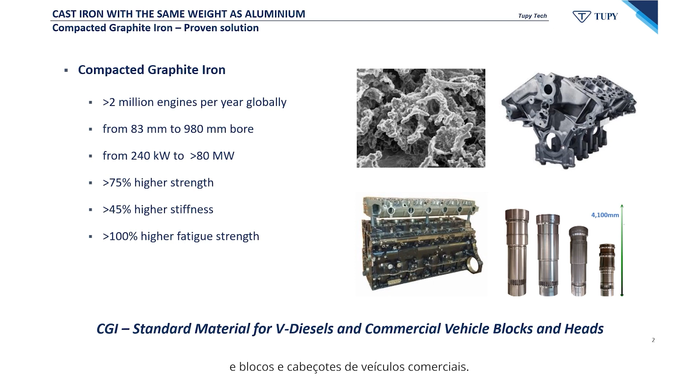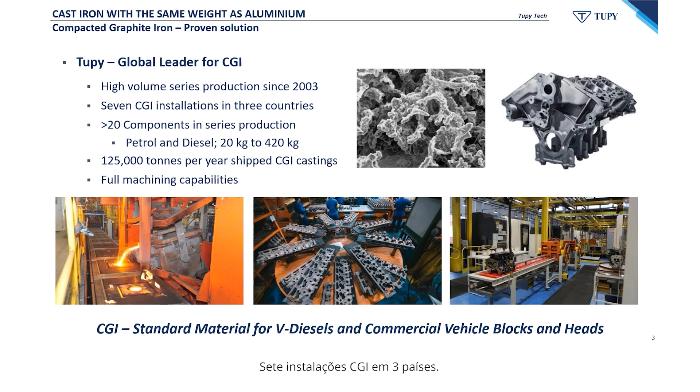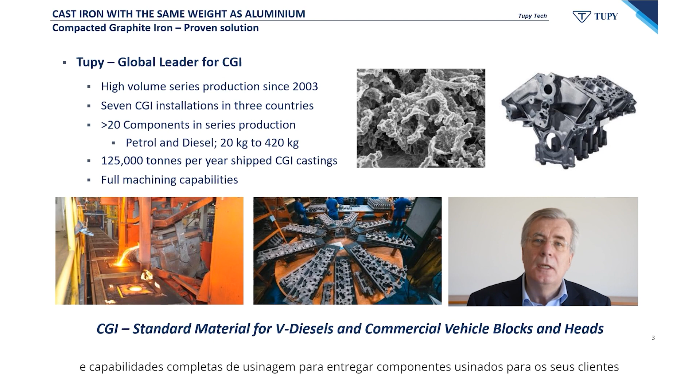Tupy is the global leader for CGI production. Tupy has had high-volume series production for CGI engines since 2003, with 7 CGI installations in 3 countries. More than 20 components are in series production for petrol and diesel engines, ranging in weight from 20 kg up to 420 kg. More than 125,000 tons per year of shipped CGI castings, with full machining capabilities to deliver machined components to our customers.

Why do we still use aluminium engines in passenger cars? The density and weight of aluminium is attractive, and we have relatively good thermal conductivity, which is especially interesting for cylinder heads.

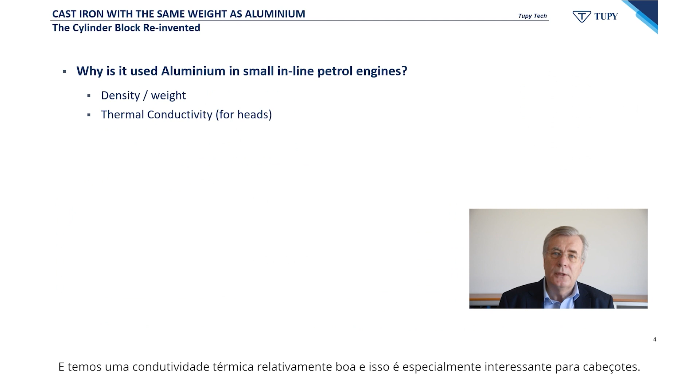Everything else is a compromise. Strength, stiffness and fatigue are limited. We need cylinder liners or surface treatment. The metal volume must be large, so the breathing areas are limited. The life cycle energy and CO2 footprint for aluminium is challenging. The NVH behavior is limited, and we have cost issues.

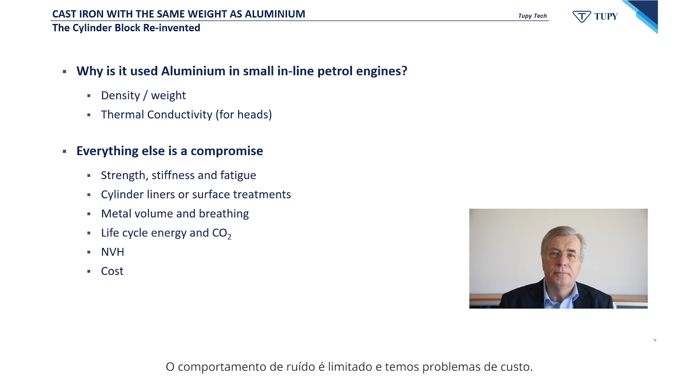Now the question is, what if the cast iron cylinder block was the same weight as aluminium? This question we will answer with a joint development project together with SinterCast and Ricardo, to build a demonstration engine and prove our concept.

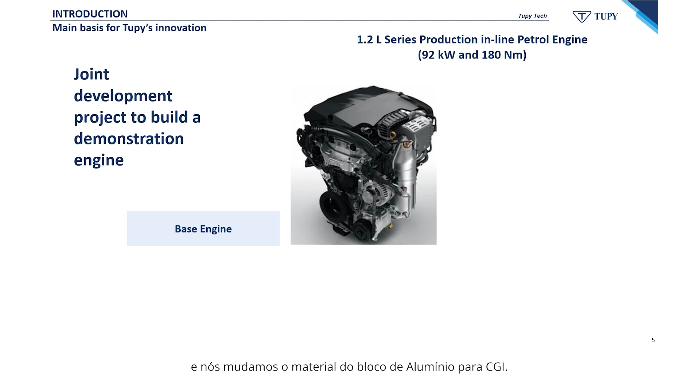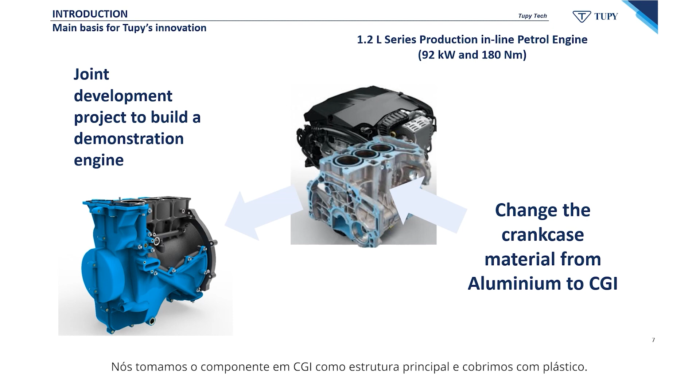We selected as base engine a 1.2 liter series production spark-ignited engine, and we changed the crankcase material from aluminium to CGI. We took the CGI component as the main structural part and covered it with a plastic casing.

Now let us have a look at the base engine. Here you see the crankcase and the bed plate, and together with the caps, this base engine crankcase has a weight of 21 kg.

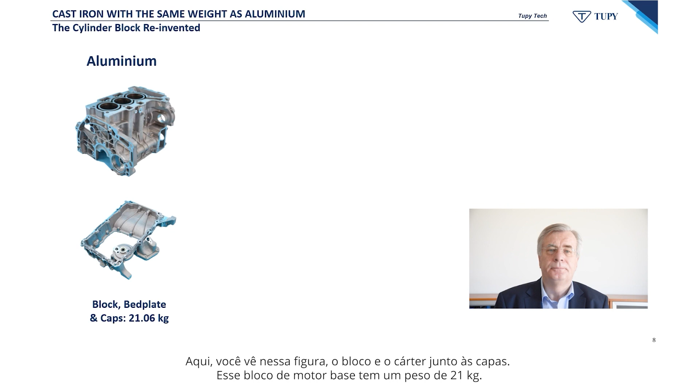In comparison, you see the CGI block, ladder frame, casings and caps. The CGI crankcase has the same weight as the aluminium crankcase. The additional results are 54% less material, which gives a better situation for the breathing areas, which could be increased. We also have the same or better NVH behavior.

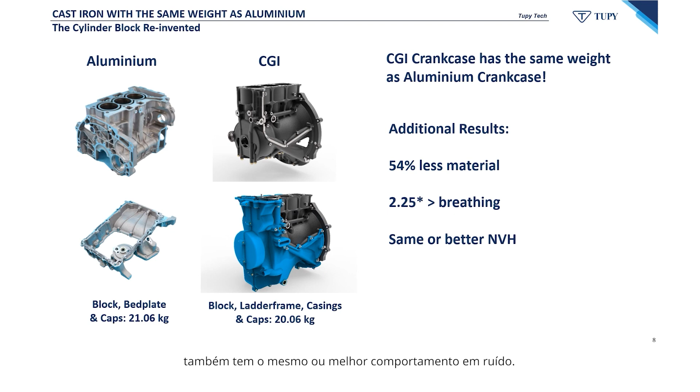Now let's have a look at the components of the Tupy CGI engine. Components A, D and E - the cylinder block, the ladder frame and main bearing caps - are cast in CGI. We have thin walls and the possibility to increase stiffness with fracture split caps.

Components B and H are produced from PA material. The casing incorporates oil galleries, oil cooler mount, oil pan and timing case. Component H is the ventilation module, which supports the blow-by behavior from the crankcase to the cylinder head.

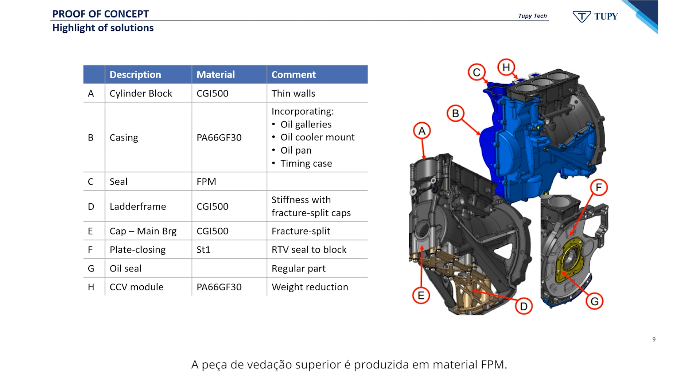Component F is a steel plate closing, and G, the oil seal, is taken from the original engine. The upper seal is produced from FPM material. Now let us have a look at the new CGI crankcase.

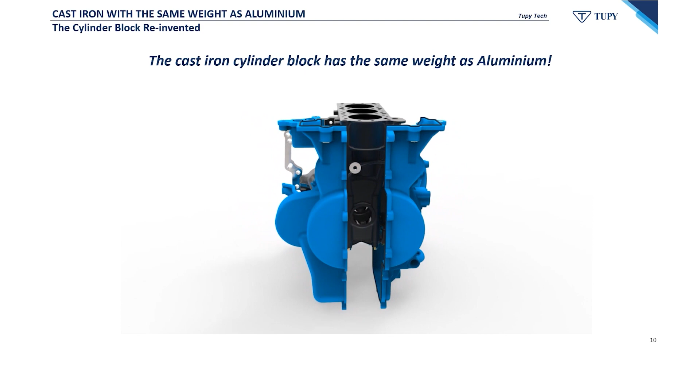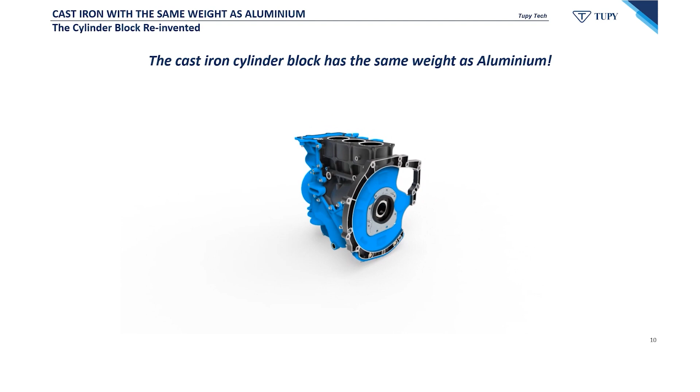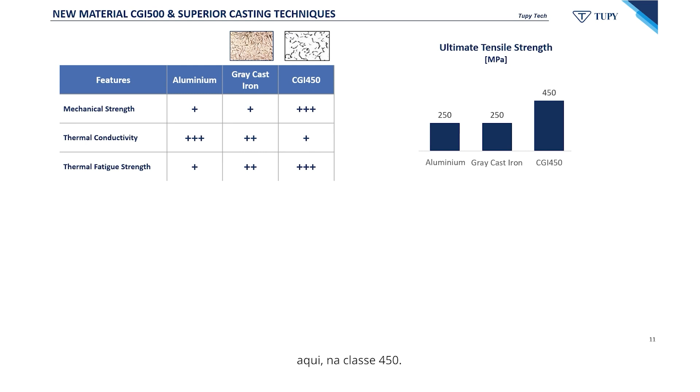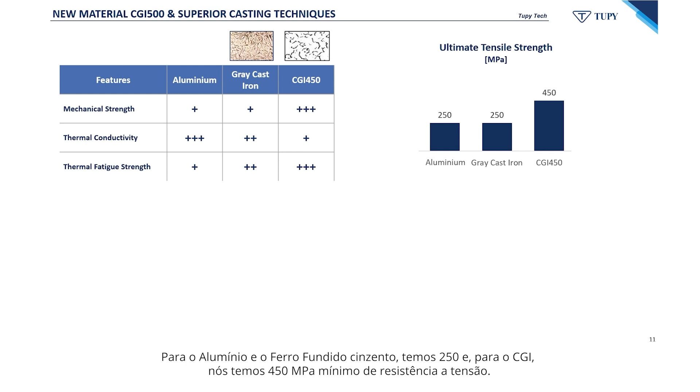The thermal conductivity is best for aluminium in this comparison. With regard to thermomechanical fatigue strength, CGI 450 has by far the best values. Please see the ultimate tensile strength values on the right side. For aluminium and grey cast iron we have 250, and for CGI we have 450 megapascal minimum tensile strength.

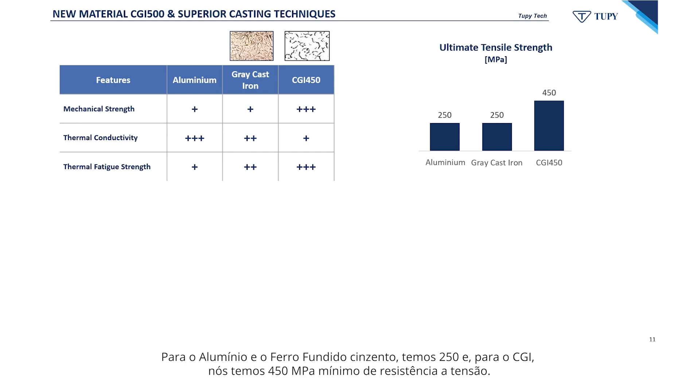To meet new demands imposed by engine evolution from our customers, to reach higher performance density, Tupy has successfully developed CGI 500. Now we are ready to offer grade 500 as a standard product. Here we have 500 megapascal as minimum tensile strength, with comparable thermal conductivity and still good machinability.

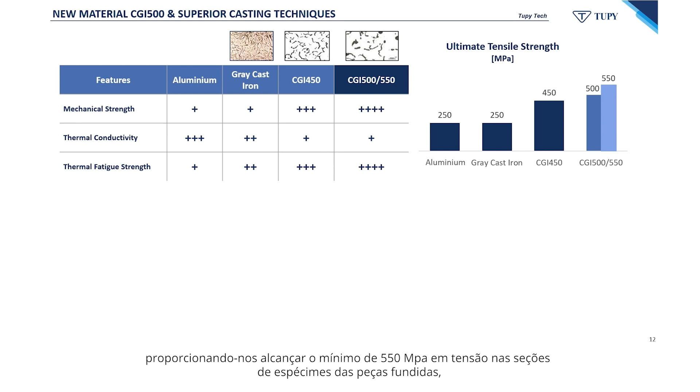In the special case of our ultralight concept, the thin walls and lightweight design of the crankcase resulted in fast cooling, enabling us to achieve a minimum of 550 megapascal in tensile specimens sectioned from the casting. The casting process leads to controlled low nodularity near the cylinder bore walls, which is very important for engine properties, providing thermal efficiency, dimensional integrity and wear resistance.

Low nodularity gives the best combination of mechanical strength, thermal conductivity, tribology, castability and machinability. Please see the details of the left picture. In the region of the piston rings, we have low nodularity values between 8 and 11%.

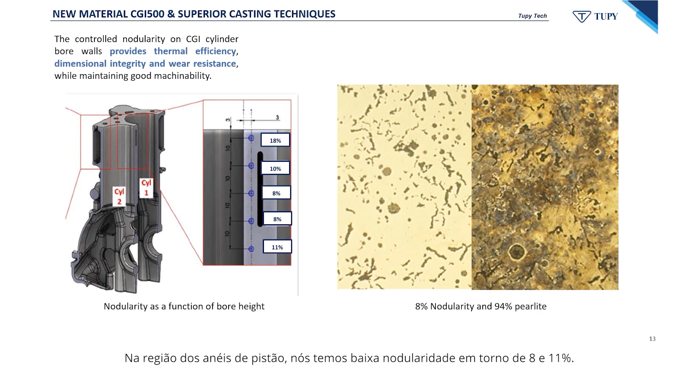The cylinder block and the ladder frame castings were produced in a volume production environment. The individual cores were assembled to form fully enclosed core packages. Metal filters and running systems incorporated directly into the core packages were placed into green sand flasks on the standard production line.

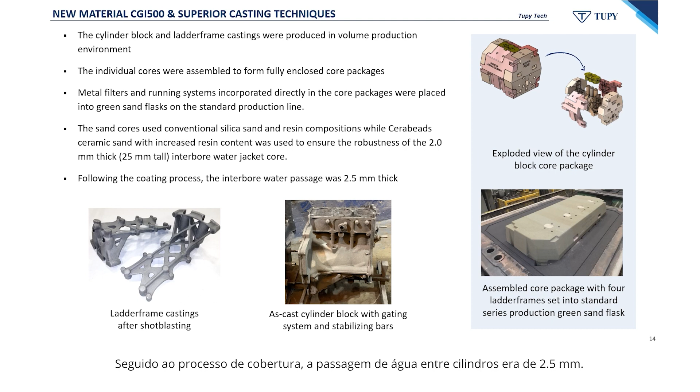The sand cores used conventional silica and resin compositions. In comparison to that, Cerabeads ceramic with increased resin content was used to ensure the robustness of the 2 mm thick interbore water jacket core, and this jacket core had a height of 25 mm. Following the coating process, the interbore water passage was 2.5 mm thick.

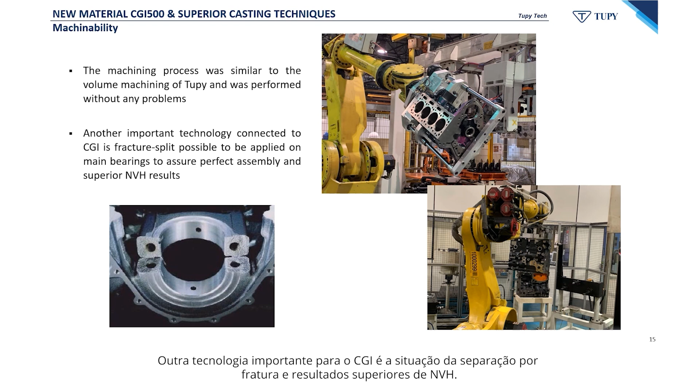The machining process was similar to the volume machining of Tupy and was performed without any problems. Another important technology for CGI is the fracture split, and this makes it possible that we have applied on main bearings a perfect assembly situation and superior NVH results.

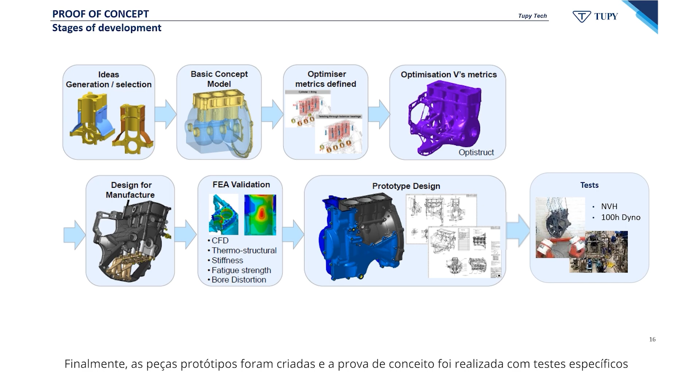We would like to show you the stages of development in this slide. It started with the selection of ideas, creating a basic concept model, followed by an optimization process which was supported by modern design tools. The next process steps were the design for manufacturing stage, taking into account volume production requirements, combined in parallel with simulation loops for mechanical and thermodynamical properties. Finally, the prototype parts were created and the proof of concept was performed in specific tests, and this completed the development project.

Here you may see as an example various CGI design variants developed with the use of OptiStruct and with different load conditions, including firing, bending, and torsional loading. The block design was iteratively modified to produce an architecture that provided the same stiffness as the original aluminium block. The design was analyzed for bore distortion and ring conformability and for head mounting stresses and local stress concentrations.

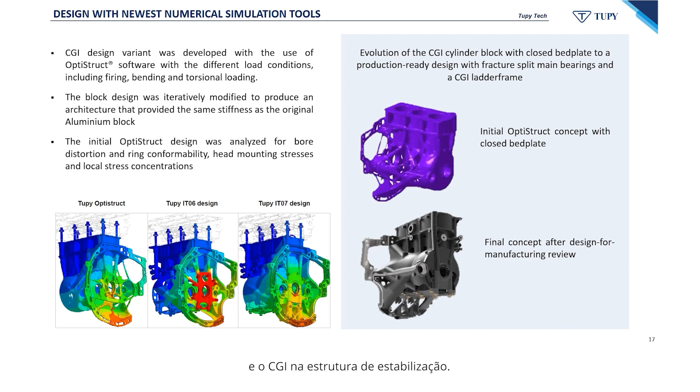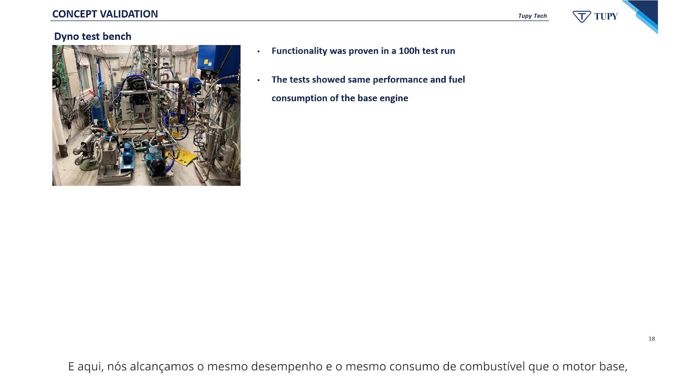Here you may have a look at the evolution of the CGI cylinder block with closed bed plate in the beginning to a production-ready design with fracture split main bearings and a CGI ladder frame. The dyno test bench investigation finalized with a 100-hour high-performance test run. And here we reached the same performance and the same fuel consumption as the base engine, and we showed the functionality of the CGI concept.

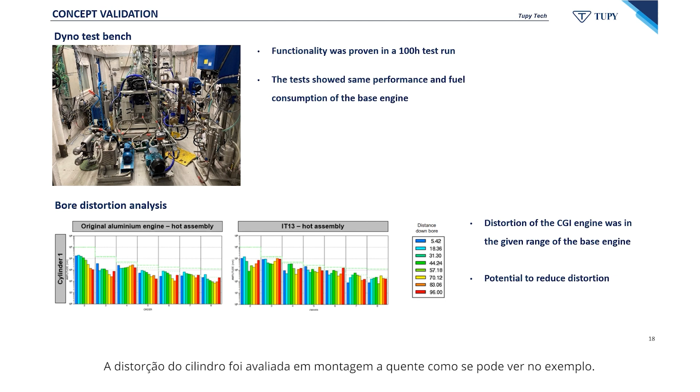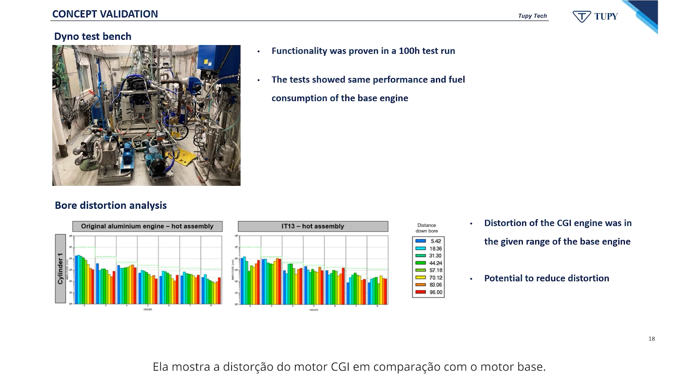The bore distortion analysis performed at hot assembly you can see in this example. It shows the distortion of the CGI engine in comparison to the base engine, and it is in the given range of the base engine. In addition, the CGI design offers potential to even reduce the distortion.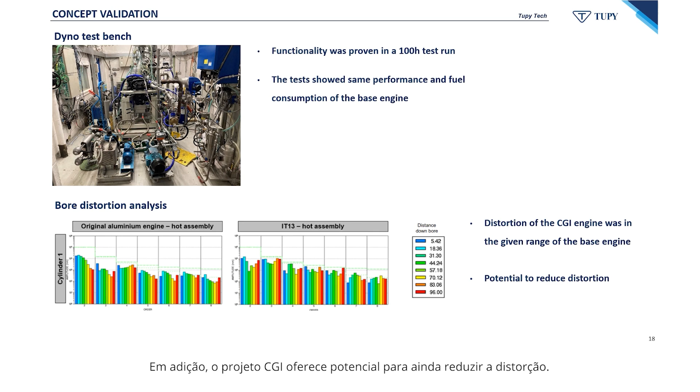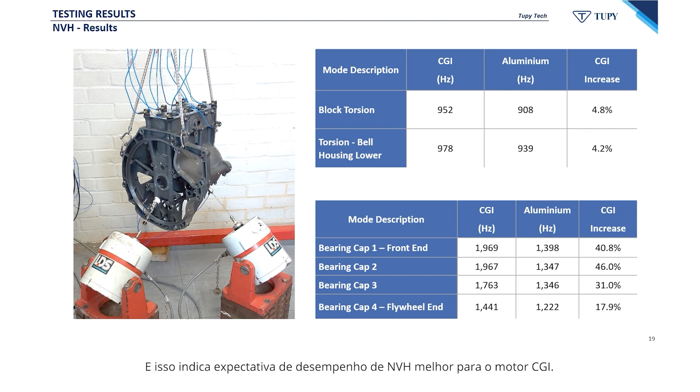The noise, vibration, harshness NVH testing delivered the comparison of the CGI engine to the base engine. The block torsion and especially the bell housing frequencies of the CGI engines are more than 4% higher than the frequencies of the aluminium engine. And the frequencies of the bearing caps are between 18 and 46% higher than the values of the aluminium base engine. And this lets us expect significantly better NVH performance for the CGI engine. The development of the project showed the proof of concept.

Ladies and gentlemen, the petrol engine cylinder block is reinvented. Cast iron can have the same weight as aluminium. We have seen the full functionality of the CGI engine. Similar weight to aluminium and superior NVH results. In addition, we have the benefit that we see a significant carbon footprint reduction to produce the iron blocks. In the manufacturing phase, we have 40 to 70% lower CO2 emissions in comparison to aluminium.

Our spark-ignited engine with a CGI crankcase enables the roadmap for future fuels, for biofuels or other synthetic fuels from renewable energy sources. Also, we can reach highest power densities and low weight, which is very important for conventional and hybrid powertrains. The next step is to apply this new technology to a customer engine to evaluate the potential of a specific application. Ladies and gentlemen, you have seen, cast iron can have the same weight as aluminium. The Tupy ultralight iron engine is ready to go.